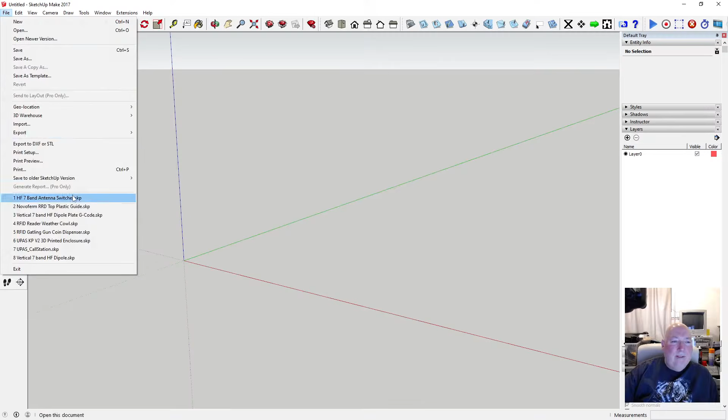So what we're doing today is optimising the fasteners. I've got this idea, but it means I've got to waste some more material. Changing the hole positions before we have the PCBs made, to make it more even, seeing as we've got rid of some fixings. I managed to get rid of fixings yesterday, so that allows us to add some fixings. So basically what I'm going to do is move that hole to the corners. All the corners have holes, which means I've got to redesign.

Excuse me, I've got hiccups. Redesign the stuff. On this bit here, the lid, we've only got 4 holes and they're slightly offset, they look a bit off. So what I'm going to do is put one in each corner, move them over. It's a bit of a shame because I could either hand drill these or just make some more. Bit of a waste of copper, but anyway.

Anyway, I need to do it. Because the bottom one, the base aluminium, has got 8 holes anyway. Some were for fastening the motor add-on, the stepper motor add-on. Once this is a tight fit, when you push this stepper motor add-on into the shaft, it basically stays there. So what I propose to do...

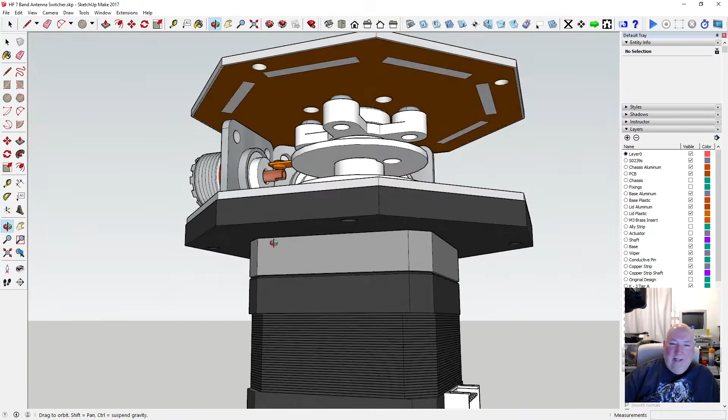What we do is I create a new one of these and have it overlapping slightly, so it sort of sits in. Once you push this over, you don't need any more fixing holes. You push it over and the sides just grab like a cradle around it, and because it's a hex shape, it'll just hold it still. All you need to do is, when the shaft clicks, it just holds it still, which it will anyway. Probably will without any material, but I think if I do that, then we just pop it in. The shaft, the stiffness of putting that into the shaft holds it on. Yeah, so it holds it on, and it's a quick fit without any fixings.

So it means I've got to redo it. I don't know how much copper clad I've got left. Probably haven't got a lot of this copper clad left. Let's have a quick look, see what we've got left.

This is going back about 10, 11, 12 years. So I've got this little tub with leftover copper clad. I've got a single piece of single-sided copper clad. I've got some prototyping board. I've got all these bits. Now, is there going to be enough to make it again? I don't think so. No.

So I've literally got one piece that'll do it left, and this is it here. It's only single-sided, doesn't matter. Now I can either make it out of that because I'll need to do some tests, or I just get the drill and mill out the holes, guess the holes and mill them out. And I also want to get rid of these holes out of here as well. I've had an idea about that.

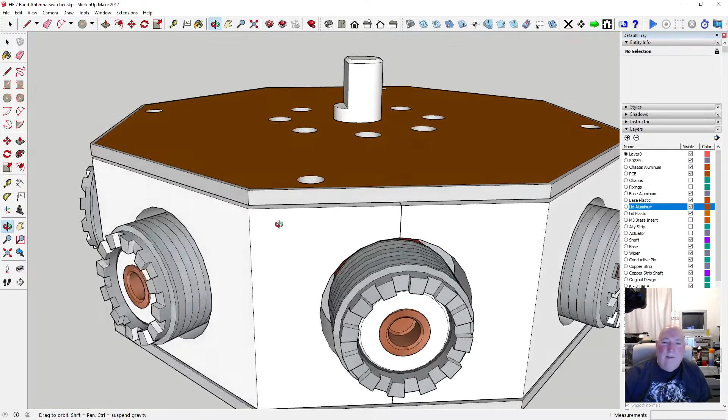Outputs, oh there they are. So when these are sticking up like that, they slightly stick up there, can you see it? That's by design. So you put the aluminium on - well it's not, I say aluminium, it'll be PCB. So when you tighten it, because you've got a fix here and one there, you've got force shared across this level and that level, so it holds them down squarely. If I've just got this aluminium holding it there, there's pressure down there, and this is free to bow. We don't want any bowing.

So anyway, it'll make it look aesthetically pleasing, so we can get rid of these holes as well. We'll have to make a slightly different shaft - we're slightly low anyway on the shaft, we're low now on this one, so I'd have to lower it a bit more to enable a plastic to go over, basically sits under here, a plastic that has all these holes in it.

So we want a couple, or maybe 4 little locating holes, small, that we can just push our plastic shell, bearing, whatever you call it, shoe. Yeah, and one on the bottom as well, so one on the base. So the one will also go on the inside down here. So we've got it, and that'll just be a flat surface, and it's just going to allow it to sit on it. So it's a throwaway shoe basically, a replacement.

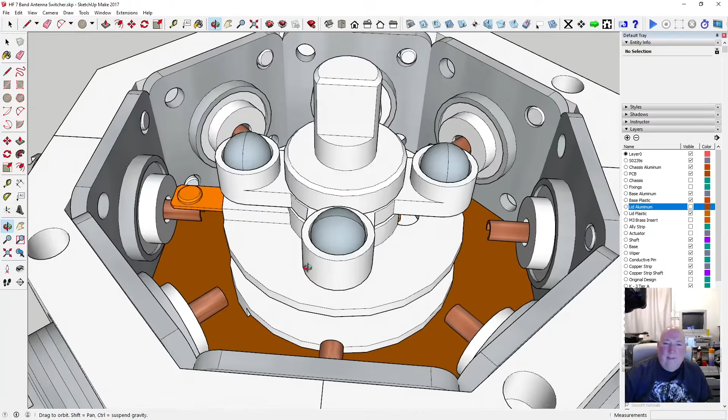Let's just have a quick look, see if there's anything else before we start the work on it. Yeah, so these are too low now, but we need them a little bit lower if we're going to have a shell anyway. So the bearings will be running in a plastic shell.

I just had an idea as well - you could have different thicknesses of shell depending on how much snap you want. So you could include, you know, you could reduce it, or if you want it lighter or more snappy, you could just have a different thickness.

Anyway, that's beside the point, so let's just get on with it. And it means I'm going to have to lose more of this work, I'm going to have to go over it all again. But the idea is to have something that's, you know, people want.

Now the only other thing is, when these are joined there, I was thinking this wants to be a ring really, but it's better to print it like that. So that gap, if you look at it in X-ray mode, they sort of interlock there with these tabs. I mean you could put a little spot of super glue in the end and just push together, and if you hold it tight, maybe you won't see hardly any gap.

So I mean there's no advantage to not gluing it, as long as you don't get the glue everywhere, but I haven't tried it yet. I think what I'll do is I could try this one actually - these are going to be scrap now.

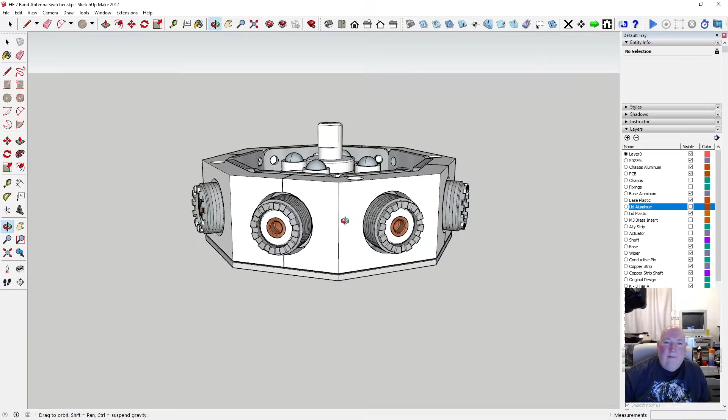Right, so what are we going to do now? Let's just get on with it then, back to the design. So there's no point keeping backups, because I'm going to have to do all this again. Now, going back to the hole all the way through, you could put a longer fixing and a nylock or a nice chrome dome nut on the one end, but you'd have like 8 of them.

And the bottom doesn't matter, cap head or something that gets covered up. So I've got a bit of work to do, but the main thing is the geometry and everything is intact. It's the same idea. Everything else is good there.

I've lost my shells. Where are they? Yeah, there's these shells that hold. This turned out a good idea. It's okay. So anyway, where do I start from here?

So I suppose we want the same hole again, moved over the corner. Because they're a component, I should be able to just edit the one and it'll work on all the others. So let's do the bottom first.

Right, let's do the bottom first. So I basically need to move the centre of that over there. So if I just draw a temporary line or a measurement from there to there, and one from there to there, and probably one halfway down.

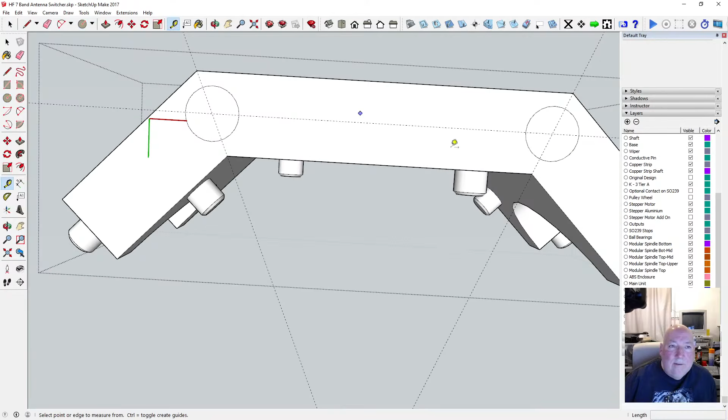Yeah, so then we need to go down 5.1 millimeters. This is so our brass fits in just right. Okay, so we're all right there. Let's get rid of this construction line. So we've managed to move them too.

Now I've got to go back around. Yeah, it does look weird, I suppose, because it's... hang on, if you look at it in parallel projection, we can't get underneath easily. Yeah, it does look closer to there than there for some reason. Why is that then?

That's definitely half. Yeah, because I'm halfway around the bend here, so I'm going around the bend. I don't know about halfway around the bend. So, I think, have I actually... right, let me just do some undo,

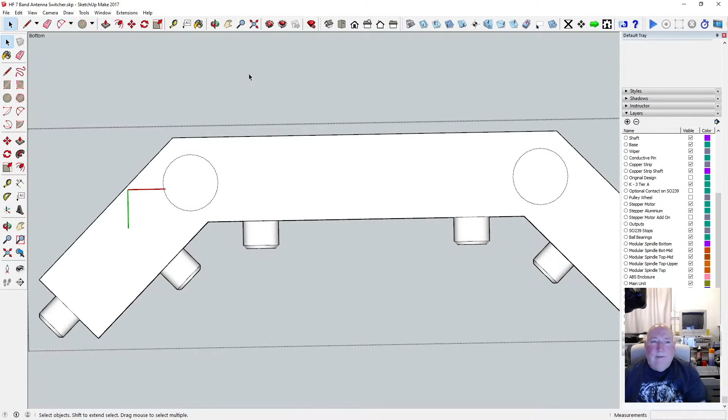Okay, so I'll do the same again. 0.25. Right, okay, so it's off center by 0.25 of a mil. Let's go back to perspective. Drop them down, 5.1 mil. Right, okay, so we want the same again.

If you want the same again, the easiest is just to grab the circle, copy it, paste it in place, turn the thing up like this. You still got them selected, so then move them if you can up, straight up like that. And then what we're going to do is cut them, go back in here and paste in place, paste them in place. Right, so we need to just manipulate this up out of the way.

Well, not that one, just rotate it round. We need to get rid of this one. So let's just bring that up and disappear that one. Okay, that's gone, and we want to bring those two down to the surface. So I'll just grab them again.

If you want to just go down or up, that's not on the right axis, press up, and if you head towards down, it'll automatically put them on the surface for you. Alright, there they are. I just need to hollow them out.

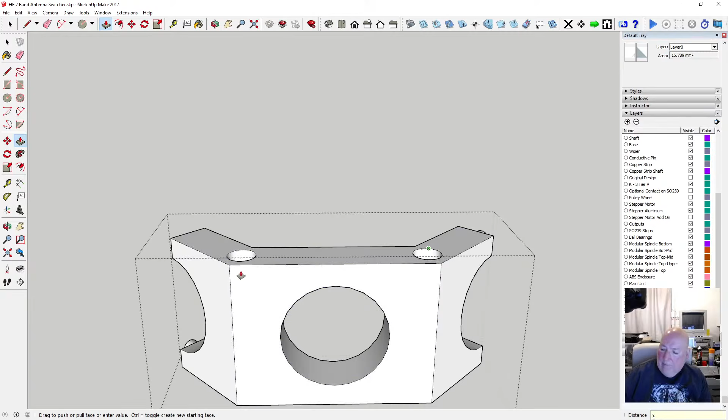Actually, they don't look right again. Why is that then? Now they're okay. So we'll just bring that down to 5.1 and 5.1. Right, and that should have done all of them.

Yeah, because they're a copy. So they're all in the right place now, and the bottom. Now all the fixings are wrong in the plates, the top and bottom covers, all fixings are wrong now.

But we're going to use extra brass. We've got rid of fixings out of here, but we're going to be happy because it's going to be fastening down the lid nicely in the corners. So what do we need to do now?

We need to, right, so I'll tell you what, let's take these out of here. I'll just get rid of these. The easiest way is just to do that, and just grab around them and do that. They're no use to us anymore then. Right, so they're gone.

Which, yeah, that's okay. So what we want now is all the holes out of here. So we want a copy of the holes so we automatically center them. I'm going to copy them out of there, paste them in place. I'll have to go around each one and grab those, copy of them, paste them in place. I'll just go around slowly.

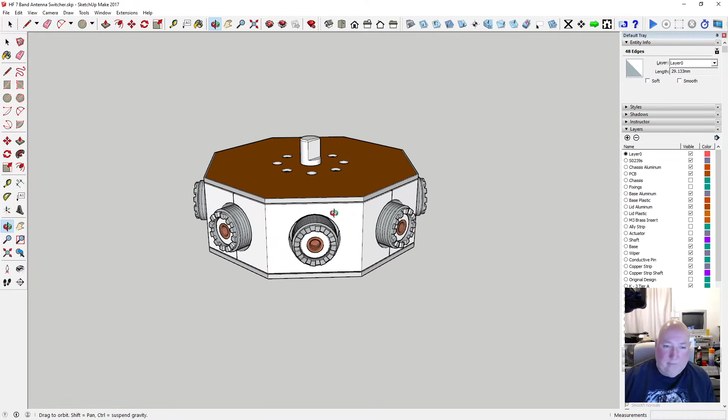So there's these next two. Right, paste them in place. Now the final two. Now if we're good, we can reuse these for the bottom one as well. So we'll make a copy of these before we finish them. All 8, paste in place.

Now I need to grab all of them. So if I just select something like that, and move them. Yeah, that's all they are, and it's on the blue axis. Axis, not access, axis. Right, so we need to put them onto there now.

So if I need a copy of them for the bottom, let's get a copy straight away. Hold the control in while dragging, go down on the blue axis, we'll leave them down there for a bit. Alright, so we want to copy these now, and cut them and go into this plate, and paste them in place.

And what we want to do now is lower them down onto the surface. So press up arrow, move down, and they go automatically to this first surface. Right, so these holes are too big because these are the brass fittings. So we need to go over them now and think about it, yeah, it needs to be a bit bigger.

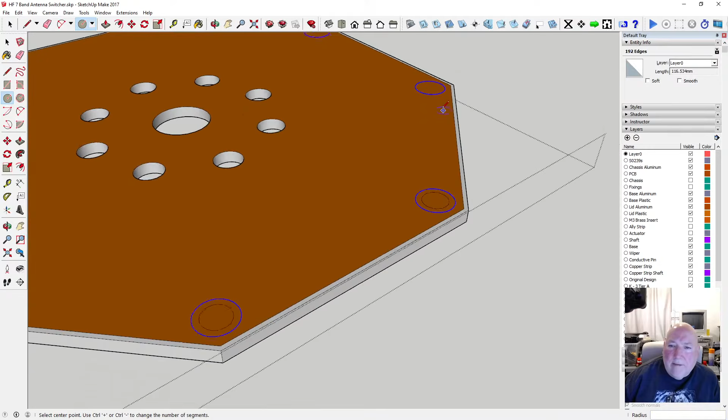Yeah, I think we can put 0.2 of a mil, I think we'll do that. Right, let's do that then. So let's do the rest, 1.6. Yeah, because we're going to have them plated. On the real circuit board it'll be plated. So 1.6. Yeah, but at least it'll be able to be bolted down evenly, rather than have one sticking up, it'll be even all the way around.

If I design this good, now we're having the inserts instead of the 1.6. Let's get these done. I'm going to delete those, and these are going to be moved onto a bit of plastic, so I need to keep them for now.

We'll have to get a copy of them. Let's get a copy of them now while we think about it. We're probably going to need a copy of that one as well, so I'll copy that out. I'll just come out a minute, paste in place, and then we'll lift them up out of the way for a while like that.

That's going to be our holes for our plastic. So back into this, and we'll push these through. These are new holes, 3.2mm holes after plating, electroplating, or through-hole plating, when they through-hole plate the PCB.

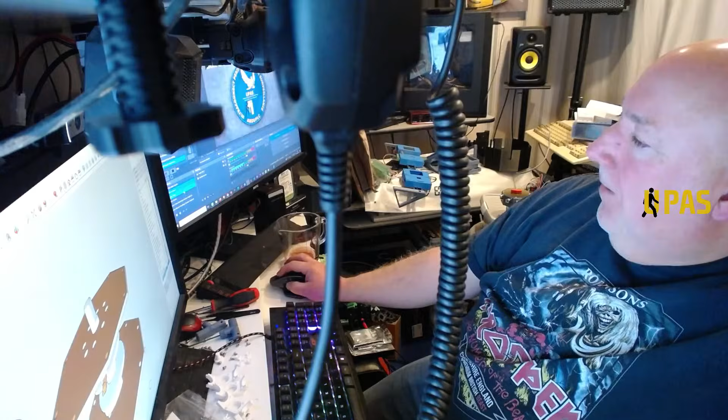Alright, I'm back. Oh, wrong camera. Yeah, I've got cameras, I've got another camera here. It's not plugged in. That looks down on when you're doing work, but I suppose I could have switched that on. Never mind. Right, anyway.

Right, so we're back on this. So it's got copper going through it. You don't get copper going through it. Let's just make that right, otherwise it'll look weird. I suppose what I could do, for the model's sake, I could make it look like we're gonna get it. Let's do that.

Right, so we're gonna just get that back, 1 mil. Let's just go around them all, 1 mil. So you can't automatically select. Why not? Should be able to. Yeah, I can, now I can. So I'm going to go around and do a 1 mil pullback on all of them. It's just so when people view the model, it looks like the final circuit board.

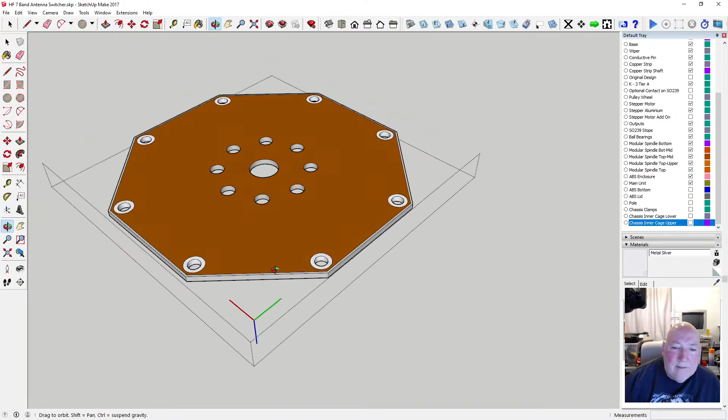Right, so we've got them there. That's basically the same either side. Right, so that's what it's going to look like, roughly. Oh, you won't, no, you won't see the copper, it'll be black, a black PCB. So let's make it black. It's copper on my design from these, because this is copper, but I'll change it to the real thing now.

I could go synthetic surfaces and try that. What's that like? Not quite.

No, it probably looks okay. No, it doesn't look okay, does it? No.

I'm trying to make it look like solder resist. So let's go to a real colour then. Just go down to, I think, a black. Alright, so we've got a black. Yeah, that's about it. So we've got a black PCB.

We can have a white or gold silk screen. Use the silk screen that normally represents things like that. Where's my pointer gone? So the graphics.

Can't see the logo there. It's not showing up very well. Why not?

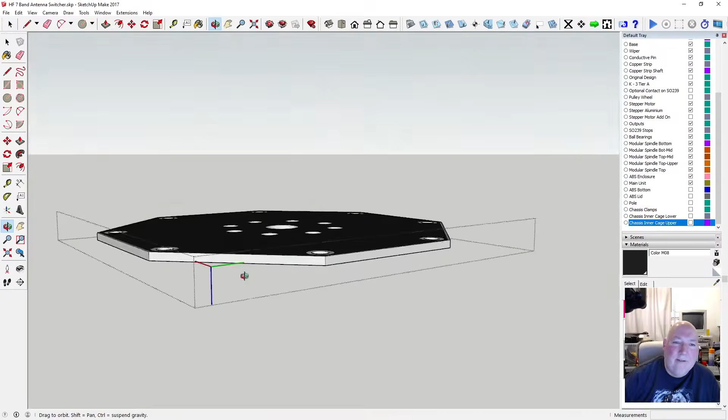But the solder resist is pulled back here to expose this pad, so it can actually make connectivity with the SO239s.

Anyway, so we've got that so far. So now we need to get rid of these holes.

But we want to reutilize the holes, some of them. Unless we leave the holes where they are. Now we don't need them that big.

So we need a plastic to go on there. So I suppose we ought to make the plastic really now before we get rid of them holes.

So there's our outline for our plastic. So we want a circle. Let's just measure from one side to the other.

30 mil. We need a bit over, so let's have a 16, a bit over, plus a lip. Can't be too wide enough.

Let's just go 36 mil, so 18 mil radius. So 18 mil radius. Let's just put that.

Got to be careful, so I'll tell you what, let's group. No, we'll group this one. We'll make a, let's make a component.

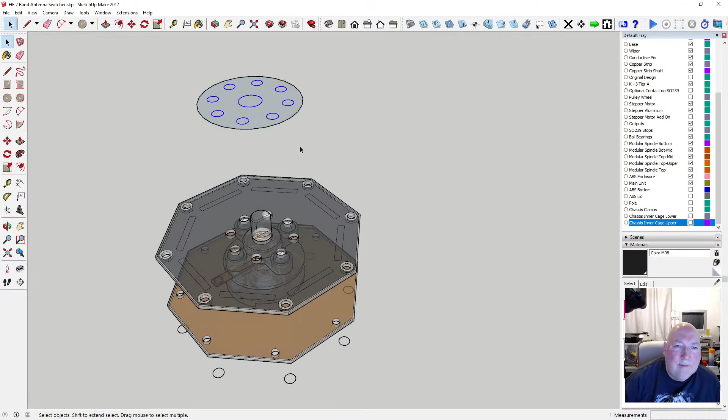So what we need now is, yeah, we need to grab those, cut them, put them in here.

Right, that. So this is going to be our plastic. Actually, we didn't want to do that. Cut them.

Paste in place. We need to give this a thickness first, so it's going to have to be a certain thickness. What size?

Don't know. Let's just go with... I'll go down and we'll call it 2.5. That's probably a bit too much. Let's say 2 mil. 2 mil thickness.

Right, actually we should be able to get those back out now. Cut, paste in place. We'll make it out of white as well, the same stuff as the shaft.

Now that's the center hole for the shaft, so we should be able to push that through. Okay, we've pushed that through.

Now what I wanted is the inverse. Yeah, the hole. So we need to go back to the other lid now. So this lid, because we're going to have a plastic insert.

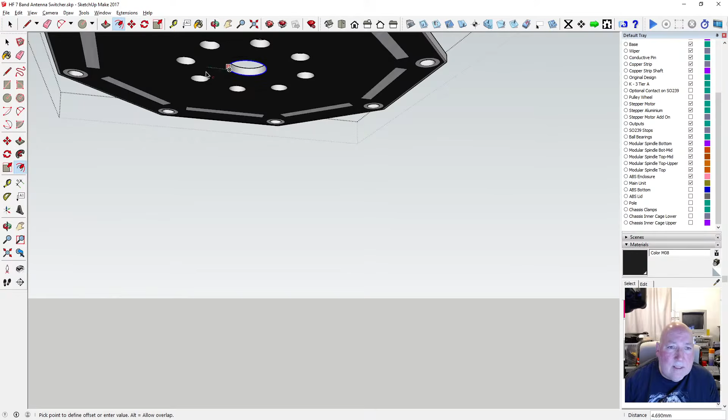So I'll tell you what I'll do. If I go from this side, what's it do it? So 1 mil. Oh, hang on, let's go come underneath it. Oh, it did actually work. Right, so I need to just push that down. Oh no, I've already done that, haven't I?

Christ, I don't know what I've done now. I don't know what I've done. Is that the original size? Alright, let me just do some backtracking. So that was the original size. So redo, Control and Y.

Right, okay, so that is the original, I think. So I need to fill it. It needs to be silver, which is the metal colour again. I think it's that one. Can't tell now, is it that one? Yeah.

Right, so we've got that. Got to come back to the surface. Oh, why does that one look different to that one? What is going on here? 2 mil, no, we don't want 2 mil. I've lost track of it now, haven't I?

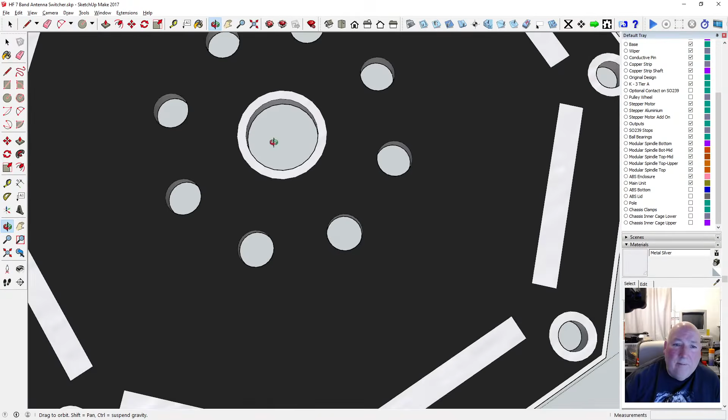Yeah, so 1 mil. So I need to cut that out like that, then pull back just 1 mil. Paint it. Come back onto the surface. Oh, it's now done it that way, look. You can't win.

Right, so it wants to do it this way now. Don't know why. Pull it back. 1 mil. I've lost track of it now. 8.2, yeah. Is it going to let me do this? Or is it going to hollow out the bottom again? No, it's let me do it this time.

Right, okay, so we need to pull back 1 mil, and paint that and that. So we've got some plating. Okay, so that's that, yeah, that's that. So then we need to get back to our plastic insert.

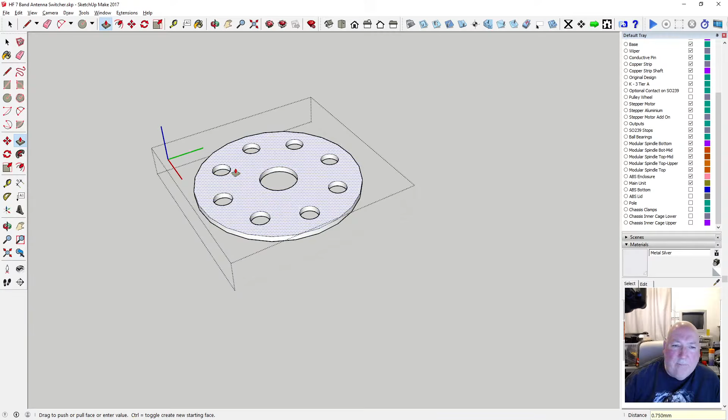Right, so now we can print that flat like that, that's fine. But it needs to have a lip on it, which we said was 1 mil. So let's do a little 1 mil thing. Now that's 8.2, that's the 1 mil. Yeah, because it still needs to be 8.2 in the middle, and then we need the 1 mil.

So then we'll need to go up the thickness of the PCB, which is 1.6. But we don't mind if it sticks out beyond the PCB, round by that bit. We don't mind that. So what I'll do is, I think I'll make it 1.6, 0.4 of a mil. Yeah, let's do it. It's 2 mil, so we've got 2 mil. Okay, so we can print that out flat like that.

Now it needs to, yeah, somewhere we need to have some way of holding it in. Yeah, it's got to stop it from spinning. So it's going to need probably something to locate it. We'll have a look at that in a minute though. We've already got a component, so we could do with putting that component.

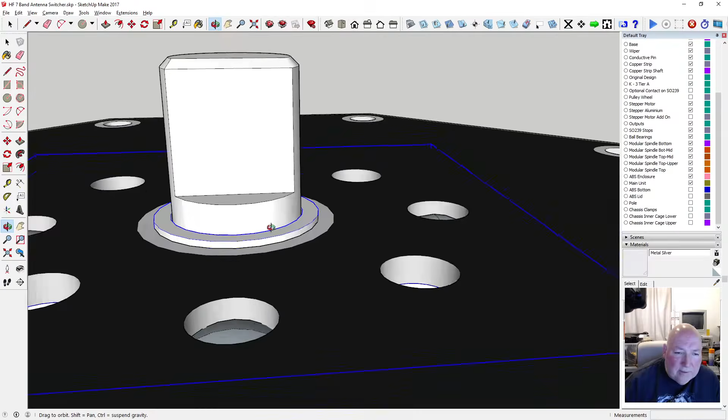Right, what's that like? Oh, that's okay. So we've got that, and it's also got the insert sticking out here, just about. Yeah, that's right. So we want to be able to push that in there, but it needs to be able to stop it spinning. It's no good those balls locking into it and it sliding around. It's got to lock into the top piece.

We don't need all the holes now, so we need a couple of locating holes. I think 4 of them probably. So 1, 2, 3, 4, or them 4. Doesn't really matter.

As soon as we've already got the holes there, now what size are these? Let's see what size these are. Can't remember. 4 mil. That's quite a lot. You actually want a pin locator. Need to be push fit so it stays in. Actually, when it's all assembled, the pins will stay where they are anyway, because they're sandwiched in.

Well, you can be able to push it into the lid and put the lid on without it keep falling off every few seconds.

So right, so what we'll do, let's just have a look here, what's going on. It's got to look right as well. Because one of these holes is also the stop. Yeah, so we've got a stop going on down here.

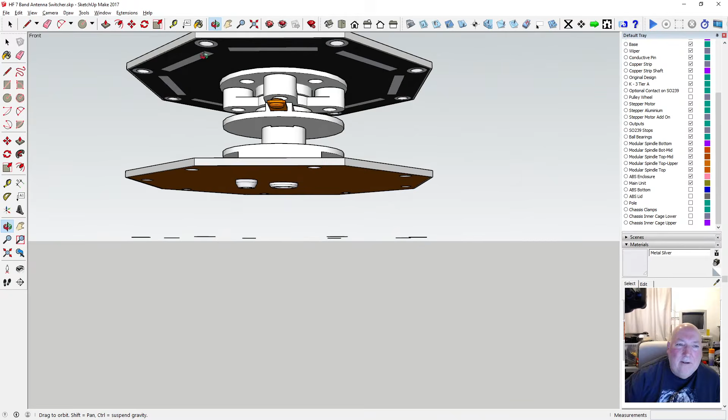Actually, it doesn't need to have these. Oh, it does actually, yeah. Of course it does. It needs them on the bottom where the SO239s fit. Yeah, so it needs the same. That one.

So I'll tell you what we'll do then. We'll copy that when we've finished. So let's go back to the plastic. No, it's not there. Where's the plastic gone? Oh, it's not there because I'm in the model. There it is.

So this plastic then, where these holes are, we need the holes, but we need to... That's going to be a little bit of a problem. Because we need... yeah, so we need a hole, but only half a hole. Half a hole, and so we need to seal the...

Right, so if I take the top off them... Oh, we still need the hole there to know where it is. So if I take it off for now, the top bit, we're going to need them back again. And now this is so I can make half a hole. So I need the holes for the ball bearings to sit in.

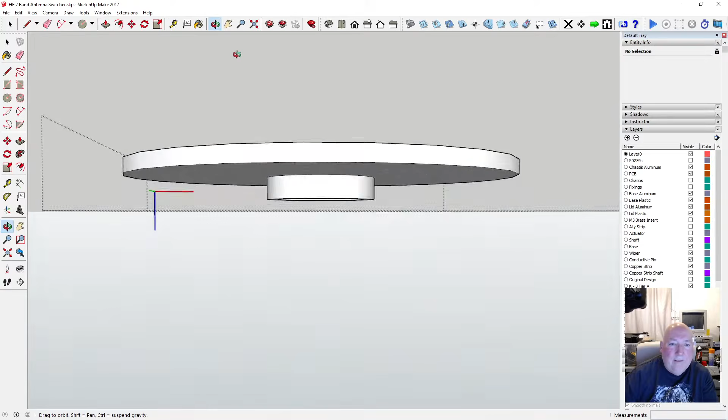So, right, let's just go with that idea. So, what size have we got here? 1.25, wasn't it? Yeah. I think it's probably not enough. I'll have to make this thicker. Oh no, it's gonna go, I don't know. God, 1.25. Yeah, let's just go with that.

No, it's not going to snap in, is it? It needs to be bigger. Undo paste. Let's just make this. It's going to have to be 2 mil, so 0.75.

I'll do paste in place, but we'll have to go X-ray. Oh, I've lost them, let's get them back again. Bring them up to this. Oh, I've lost them again - keep selecting the wrong tool.

Alright, let's bring them up onto the surface. Is that the surface? Yeah. Okay, now we should be able to do, yeah, that's it. So we need to drop them.

Actually, that's the wrong way around. Yeah, these ought to be cup shaped, really, hadn't they? Tell you what, we'll drop them down. What should we say, 1 mil?

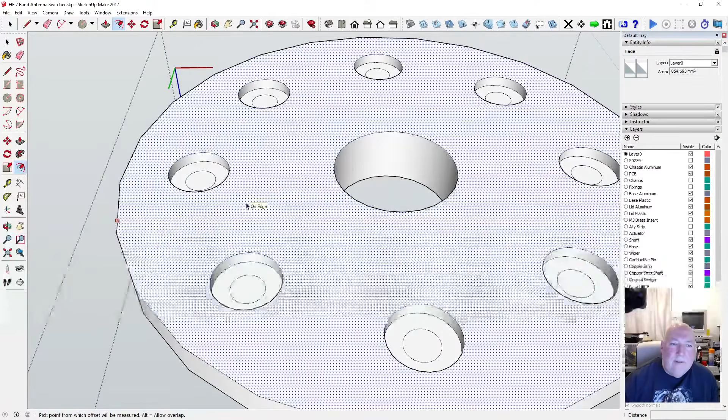Right, 1 mil, and do more at 1 mil from the edge. Okay, 1 mil, and I suppose - how did I do this last time?

Yeah, so we just want a little bit of an indent on them, a bevel. So I could go down - I tell you what, I could just go in. Not a lot, you don't want a lot. I don't know, 0.5. And then I could grab hold of that and take it down to there, basically 0.5, and that'll give us this cup shape.

Yeah. Okay, so let's carry on with that. Oh, I've got to make it go down 0.5. Let's just do them all at 0.5 and then drag the thing down.

And it begs the question, why isn't this a cup shape? Yeah, maybe that needs to be a cup shape. But if it's a cup shape, it won't snap in, it'll just push in. I need to actually snap into place, I think.

Anyway, this bit can be made again. What we can't do again is keep making the PCBs. So this little insert can be altered till it's perfect size. So, yeah, we'll keep going with it.

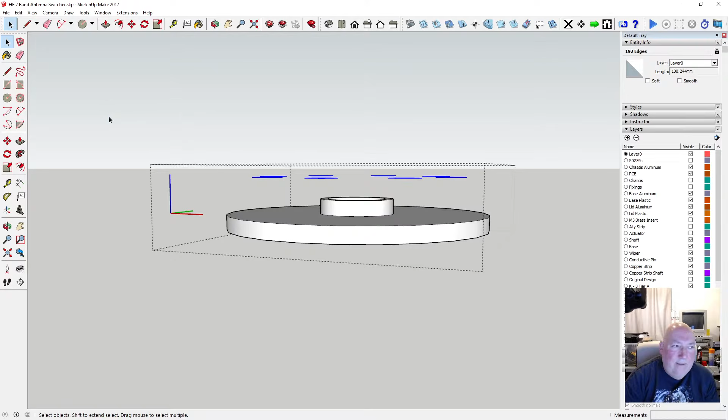Right, so we've got that there, we've got the cups, yeah. So now we need to turn it over and we need to drop these down to the surface. I want to save this really - I don't do nearly enough saves. I mostly do saves without even knowing, most of the time.

They're on the surface, so they need to come through to - they don't have to go to a point slightly higher, they can just go 1.6, as long as they locate, and they're going to be the same size they are now, I think. Yeah, 4 mil, so they'll just push in.

Okay, so let's just do 1.6 - that's the size of the piece, the thickness of the PCB. So anyway, it should push in and stay in. This piece, this sacrificial lining, let's call it a friction lining.

You could make them slightly dimpled, beveled, but I don't think we need to - it should just push in. If it doesn't push in, we'll make them, reprint it out slightly smaller. So that then can be printed now, probably.

Okay, so that's that, and you can see it's already flush through the holes. Oh no, did we actually get rid of the holes? Can't remember now - no, we left them. That's right, we do need the holes because it doubles up if you want to put the bearings directly on it.

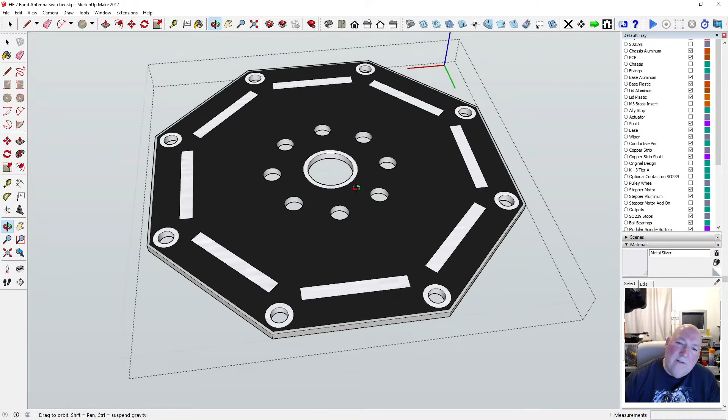Right, so we need the same underneath. We're going to get 20 boards made, 2 for each, so you can make 10 of them, and they're going to be the same top and bottom.

Andy, how you doing? Andy Crowley, he's always a regular.

Oh, clock cycle. Wait, welcome clock cycle 32. That looks awfully like one of my graphics. I created... oh shit, I know what it is, that is me. I thought someone else was answering you then. Sorry, I'm monitoring with, yeah, clock cycle 32. That's one of my alter egos on a different browser. So if you don't see me coming up, the only way I can get you to notice is I'll just say hi from within OBS. There you go. So what it was, one of my monitoring browsers, normally it wasn't showing any watchers, it was just saying no watching, so I've got no idea if anyone was watching. Something's happened to the cache on it.

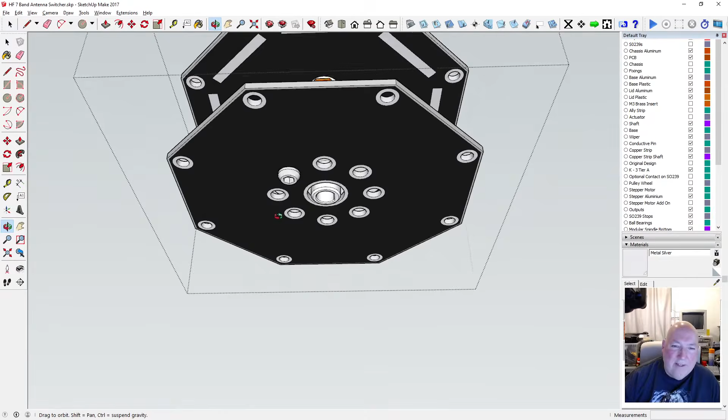So we've got the same circuit board in black, not anodized aluminium anymore. It's PCB with black solder resist, which means we can silk screen anything on it. This bottom one, I'm thinking of silk screening anyone who contributed to the design, their name on it, a bit like the Amiga 1000 where the designers put their name on it. So we could have a silk screen there with anyone who contributed - that includes you, Andy. So I think we're going to have the names on here. Why not, that's if you don't mind. Doesn't mean anything, it just means you helped design it, basically. It's no legal responsibility or anything like that.

Right, so I need that plastic lining now, so I'm going to have to alter the shaft again. We've got to get the plastic lining, and work out a separate lining to clear this fixing, but still grips in, just to hold itself still so you can slide against it. Yeah, because we don't want plastic onto circuit board. We want a little bit of a lining, it doesn't have to be very thick.

Right, let's go back out of here. Right, where's this plastic gone? So we've got the plastic there. Now that is slightly wider than the rest of the shaft. Did it need to be? I'm not so sure, might as well. It doesn't harm it, so we want a copy of that now.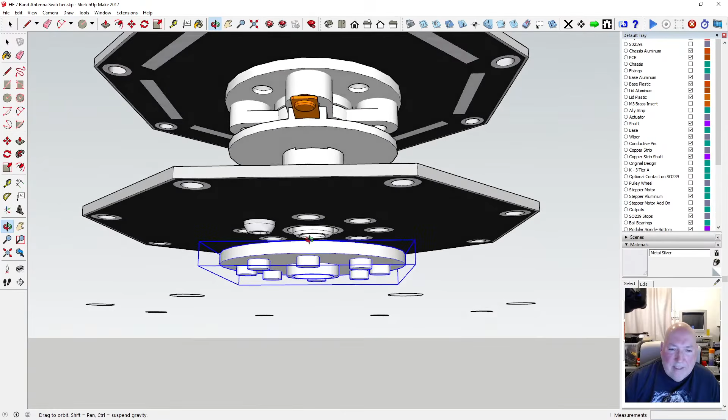We're gonna have that already got the right size because we copied the top. So we need to fit that now to the bottom of there. Right, so if I grab it from there and go up on the blue to tell it we're going up on the blue, and then use this as a reference.

Actually, it's not enough. We've got the wrong surface. So undo that. We need to grab it from this here, push it up and tell it we want to come flush with that surface there. There we go. So we're in there.

We've got the nut. Now we're going to have to make it unique to avoid. We need one with a hole in it. So let's make it unique.

You don't mind? Yeah, no? Oh, great, great. Yeah, so when I make the circuit board, we'll add to it, now you can have your name on it. And on the Amigas, they were signatures, but I don't know if you want to put your signature on. Probably not a good idea with identity theft and all this kind of stuff going on.

It was never a thing back in the day, was it? But I'll just put the name on. But anyway, so

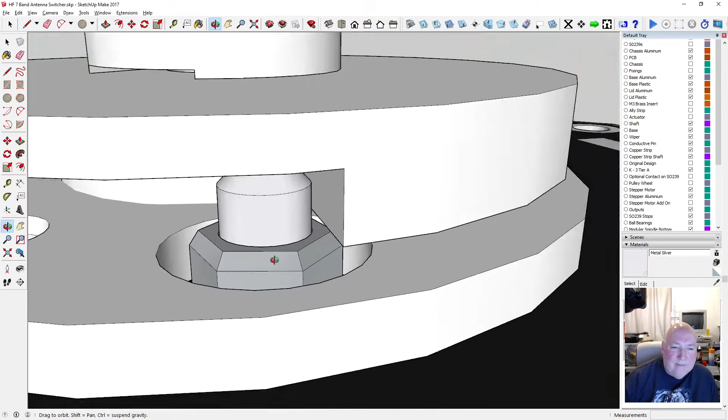Yeah, so you can still put your nut on. Might have a bit of a problem tightening the nut though. It just stuck out a little bit though. Yeah.

Okay, so there's your nut. You might have to get your... oh no, that pushes on anyway.

Now, so you put your nut and bolt, you put your fixing on, M3 and your nut, on the circuit board, you tighten it up, and then this just drops over the top of it after. Yeah, and it pushes through. You can't really see it because it looks like it's flush with that.

And if you wanted to, you could print it in black ABS so you can't see the white, but you will see those, unless I make the silk screen go over it. Can be through-plated and the silk screen can go over it.

Well, I'm not that fussed really. One will be covered up by the stepper motor driver, and if we want to cover these up, we can make the knob wider.

So let's try the knob on, see how much. Yeah, so we could redesign the knob, like they do traditional one, with some round, and then yeah, could do.

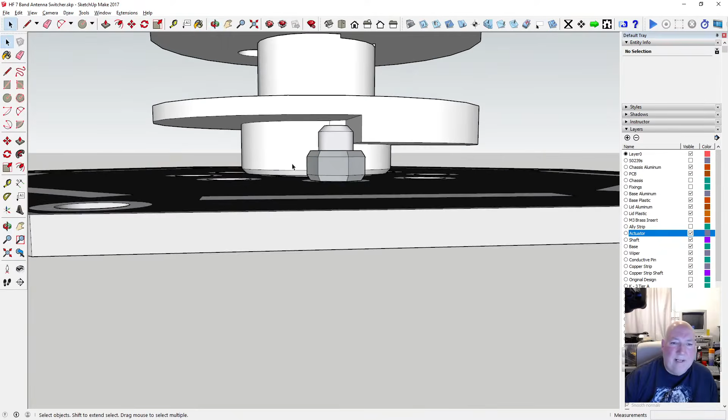If we can. Right, let's just measure that packer. 2 mil, I think I said. Yeah, so if I go into this, and what have we got there? 2.4. So we can do, just grab the whole thing there.

That's going to go into the circuit board, and we're going to have a lining. It's going to sit on a lining, isn't it? Let's just try and move it up by...

Let's move it up by 2 mil. Let's see what happens. Well, you got your 2 mil. Right, she just got away with that. Just about got away with it.

So what we need to do now is see if that actually fits with the lining. Yeah, we've got a little bit of clearance, that's okay, so that'll do. And you've got 2 ABS surfaces, and they're very slippy, so yeah, okay, I'm liking that so far. So that's not in the way.

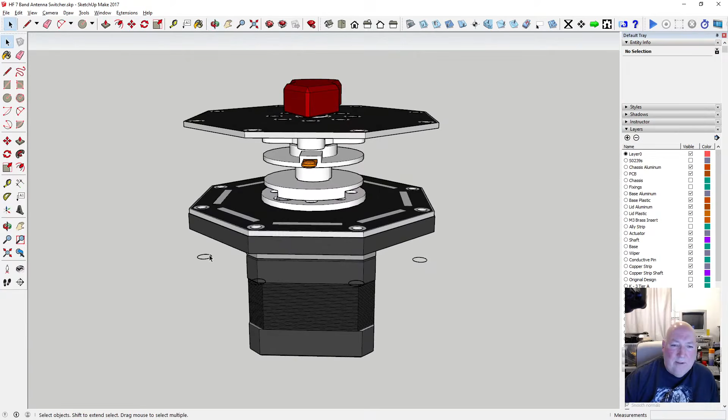So this add-on, yeah, we're going to have to alter that now. It's going to be quite easy to alter this. Oh, we don't actually need them anymore because we're not using them. Let me just delete them out of the way. We're not using these anymore because we're all about reducing fixings.

So let's get this plastic here. Right, we still retain the stepper motor wells, but all other fixings - oh no, they need to have a recess on them. Yeah, we still need the recess, but in the corners. So the ones I've just deleted, I do need them. Right, undo, close, undo, close, undo, open, undo, open, undo, layers, undo, erase. Right, so we do need them.

So let's grab them, cut them, and put them in. Where's your stepper motor add-on gone? There, right at the bottom. So it's just this bit we want. So we'll paste them in place. There they are. I need to bring them up here, and we'll leave them there until we get rid of.

We've got to get rid of these old holes now. So let's cancel some old holes off. So we don't want that one or that one. Can I just delete that and that? Yeah, I think I can. We don't want these old holes. We're not using the holes anymore.

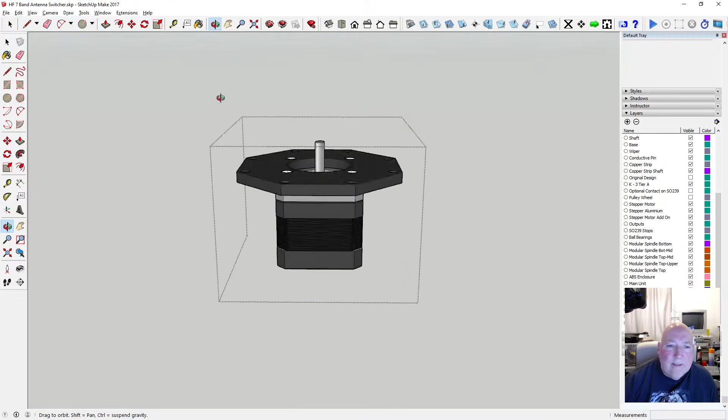But we've got to alter the size of the outer. I've got this idea without using any fixings. Right, so we've got that. That's as it is, so that covers all the fixings up where they meet. Under here, you can't see the fixings.

I've got to move all the fixings yet. So all the fixings are now in the wrong place. So I'm going to have to redo all the fixings. But the hole is there ready for the cavity in the plate to miss the fixing.

Right, that's fair enough. Now what I wanted to do is, because this is fixed to this spacer and this add-on, and it slides in on a flat side of a shaft, so all we need to do is stop it rotating. And to do that, all we need to do is raise the side up level with this bottom PCB just a little bit.

So how we do that - we're already slightly bigger than it, so we need a bit of clearance. So that's our clearance ready. Okay, let's just come at it from this angle. So I need to grab, extend the outer bit. Right, so it needs to be the thickness of whatever it needs to be to go up along the side.

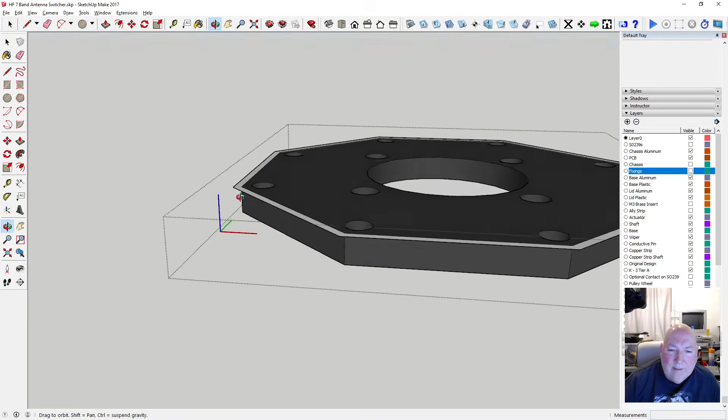1.5 mil, yeah, anything's better, it doesn't need a lot. Let's say 1.5 mil. So there's our 1.5 mil. And obviously it can't start from nothing, so it's going to have - can I just pull that down to there? Has that created a hollow? No, we're okay. Okay, so we only want to go up the height of a PCB.

So 1.6 mil. Okay. So there's our push on, got to make it the same colour. So we print it flat and it does the walls and it slots over the PCB just enough to stop it spinning, keeps it on.

No fixings required. Yeah, no fixings required, just pushes on, pushes off. Perfect. Right, let's just make it the same colour as this, I'll tell you, go back into it. Let's just make sure we haven't done anything weird with it. No, we're okay. Oh, we've got some inner dimension there we need to get rid of. So I can either start deleting it.

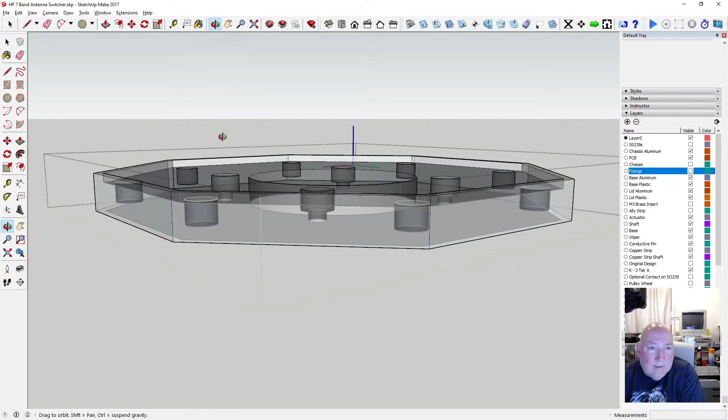Right, I'm determined to get this into a finished state. Not today, but to get it finalised. So that's that. So we just need to get rid of this one.

Right, so we're all one piece of plastic now, according to that. So we've got the wrong colours going on. Right, so we need to make it all the same colour as that. So let's try and find the colour.

Let's say it was that one. Yeah, that's the one. So it's ABS black. Black ABS.

So it's on a flat surface, so this can be printed easily, because this is all flat here, and it's the way it is now that it gets printed that way round.

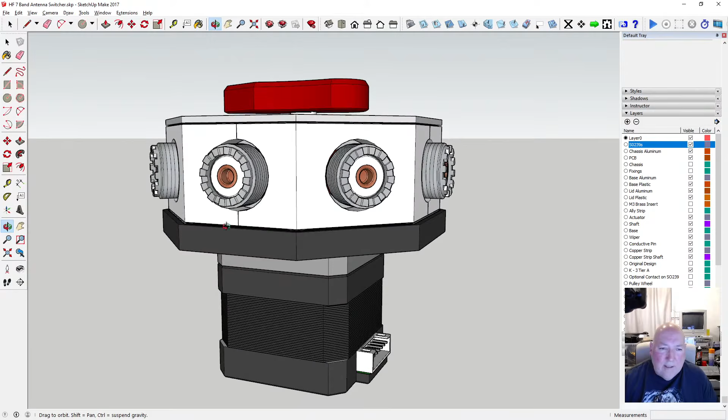Let's put the chassis back and the SO239s. So yeah, it just overlaps slightly there, and it's not going to get in the way of putting your PL259 on.

So yeah, you'll have your name on it, or we could even put the names on top if we have to. But don't forget that's an add-on. That is an add-on.

Actually, if we're going to use the same PCB for both top and bottom, then the names will be on the top. Yeah. So...

Names will be on the top, and just some logo or something, open source logo, names created by whatever, and a little bit of livery to tell you this is antenna 1, 2, 3, 4, 5, 6, 7, and this is the incomer.

So we'll do some livery. So whatever you do on there, the same thing's going to happen here. So the problem is, hang on, it will be in reverse though, won't it? Got to be careful how we do the livery then, because...

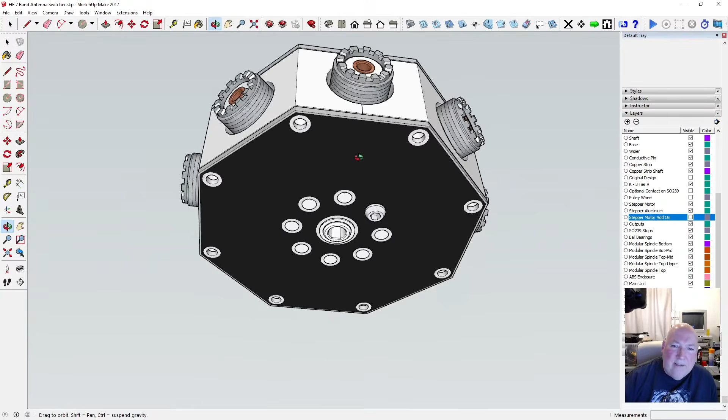So we're going to have to make the livery, yeah, I don't know. That's a shame. Unless we do something clever with the insides, like we've got these pullbacks, so you can't really have livery in here.

Yeah, so unless we just have a little marker, or probably, you know, I don't know. You'd have to have two separate ones. Yeah, because it'll be opposite, won't it? Anyway, we might have to end up having two PCBs made, two different ones.

Or we disregard the bottom one. So the livery's done on the top, and you get livery on the bottom, but it's complete opposite. That'll confuse people.

Anyway, right. So we've done the stepper motor add-on. I wanted to implement that. That looks like it's okay. Covers all the screws. So you'll have some nice screws on top showing. Now that can be anyway.

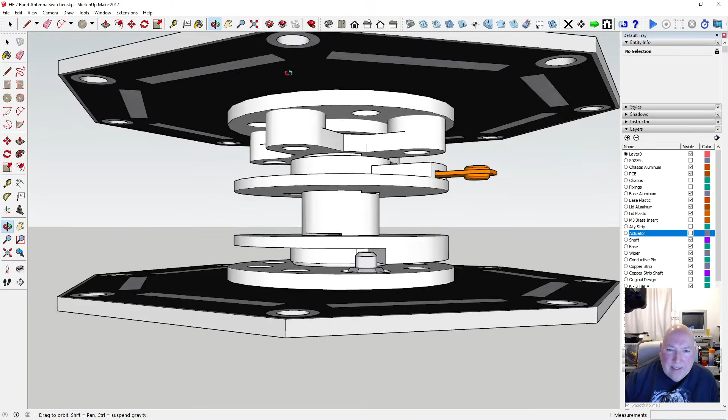Alright, so we've got our top and bottom lids sorted out. And we've got our insert now. We haven't got the space here now, so we need to sort out this bit here. We've got space here, so I think we need to bring that level with that.

Can we do that? Yeah, we can. So we need a bit of space. Right, so there's no harm in bringing that down level with that, so we'll do that. We'll bring that down level with that. Just tidy up this extra bit of whatever this is.

Right, so we've still got the same idea. Oh, there's another one there. So we've got this bit, and we can still get our copper strip in. That, if anything, will make it easier to solder onto, less stuff going on.

Okay, so the shafts come through there. So we've got that bit there. Now that can be slid down. That can be slid down.

I'll just go onto it and bring it back up 0.25 mil, because you never get them exactly right.

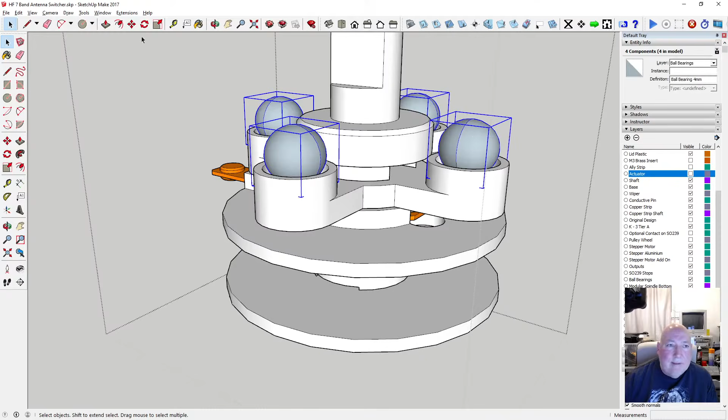Now, where's the ball bearings? Hang on, oh there they are. So they have not sunk down enough, so they're going to have to be sunk down a bit. Let's go down, I don't know how far. Probably something like that. Let's have a look at the cups.

This is why we try and model them exactly the right size, so we can see if they sit in the cups or not. They do sit in the cup. They could probably go a touch lower. Let's just go a tiny bit lower, 0.2. Yeah. Okay.

Right, so you've got your ball bearings in there. They've got a bit of space around them. Now we need to sort out next this bit. Where's the plastic gone? That plastic's part of the other thing, but ultimately we need to get that plastic surface. There's a surface, so we need to work out what we're going to do with that.

That needs to go down, whatever that is, 2 mil less 25, so 1.75. Let's just go with that then. So that whole thing needs to drop down 1.75. We should just be able to do this. 1.75.

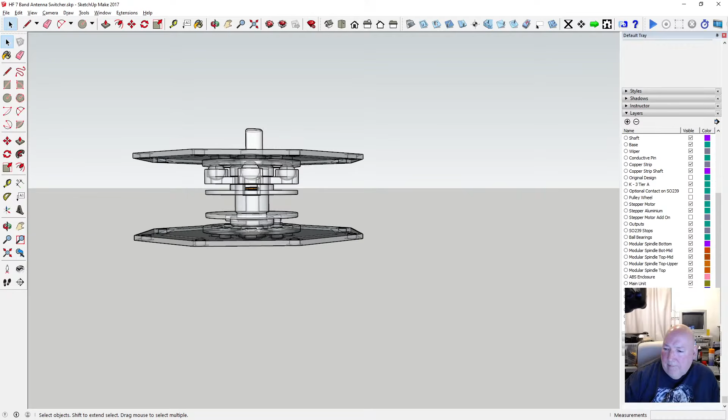Where's your copper strip and the end of the shaft? Let's just make sure the stepper motor add-on isn't going to snag on anything. Alright, the end of the shaft is just there. Alright, so you've got more cavity, that's okay. Probably be able to make that more solid, but we'll leave it for now. Yeah, it's away from the copper strip anyway, that's the main thing.

Okay, so now we can, so that'll lock into there. I'll tell you what, these are starting to annoy me now. I think I need to do something like this, 0.5. Even though it's nice to have a smooth, 0.5, let's just do it. It'll make it easy to push it in as well.

It just doesn't look right in the model. Alright, so I'll just bring them down, 0.5. Yeah, just allows it to, and I suppose this probably needs maybe a 0.5 on it, maybe. Okay, so it just pushes in.

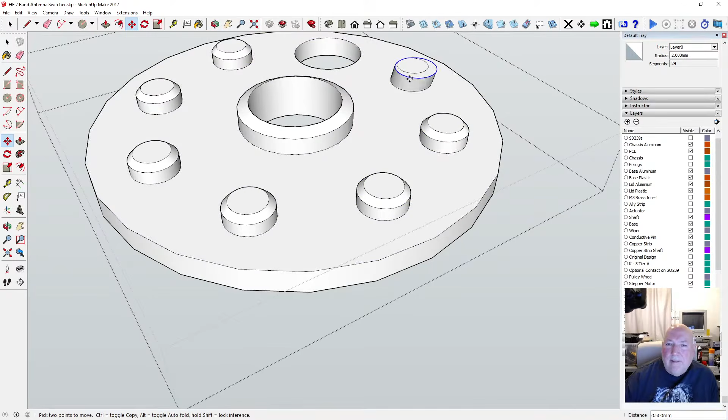Right, so we don't need to do anything with that. That's perfectly fine as it is. Okay, right.

So we've got our two slip surfaces. Right, I'm upside down, why am I upside down? Oh, because I was there. So you can actually see where your balls go. Yeah, so there.

Let's have a look. What's going on? So it's in the cup somewhat, it's just covering the hole. Possibly that needs to be a bigger hole, but it wants some kind of snappiness to it. And they were still stiff, they were a bit stiff. Yeah.

So I think we can make that a little bit thinner and drop this down a touch. Let's just get the right way up again. Alright, so a little bit thinner. Alright, so we'll go into this. Alright, we'll just drop it a little bit thinner, let's say not 1 mil. Let's say I'll just probably put it back where it was, haven't I?

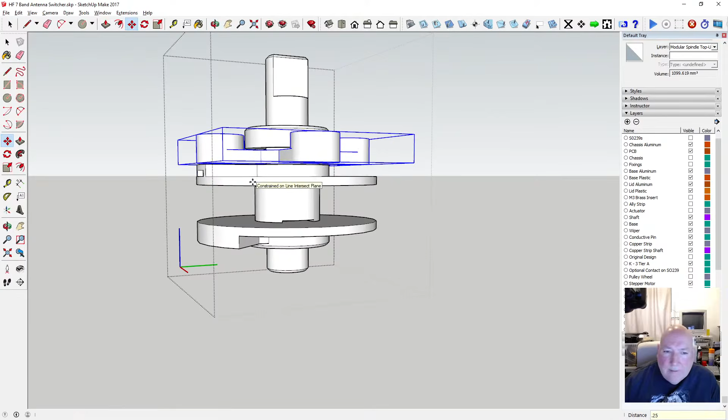And then the ball bearings down, 0.25. Okay, right, so we can't see the plastic. Why can't we see the plastic? We ought to put them there, haven't we? So we'll cut these out. No, it's the wrong one. Yeah, we'll paste them in place.

Okay, you can see where the ball bearing linings are there, and we've got extra stuff going on this one. When we don't need all them holes, do we? Oh, we do. We don't need the cups, but we might as well have them. So let's move the stepper motor add-on off. Where's it gone? Hang on, let's turn it round. Yeah, you can see them. What is going on? Yeah, that's the same as the top, so they're flush like that. It sits in there, right?

Okay. Right, so that's everything done. Obviously this, that's going to be fixed into the top plate. The shaft will move and the balls will snap into those. Plus it should be smoother, and it's a sacrificial bit. If it wears out, you just change it, but I don't think it'll wear out if it's just about the right length. So you build it in stages. You can get to your wire.

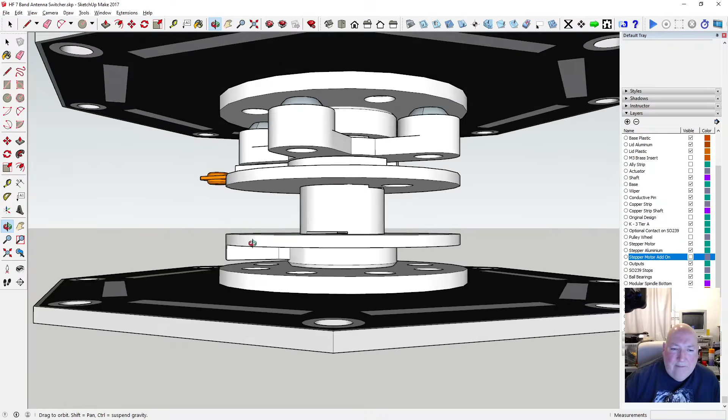Now, we've left that the same place. Yeah, so everything else should be good. Right, what's next? What is next? Why can't I see anything? Right, let's put the stuff back together then. So we're still calling it lid aluminium, but it's not. It's a PCB, so we'll leave that for now.

Alright, the actuator obviously needs a redesign, maybe to cover this. But before you got the option, you could redesign that and have the balls coming through the PCB, but anyway.

Right, so where are we with it? Right, none of the brass fixings, the brass inserts, they're not in the right place now. So they need to be realigned. How long have we been going? 2 hours. Right, do we need to print anything off? Not really. We're not in a great rush to print because we haven't got any PCBs.

What time we got? 9 o'clock. Is that enough for one night? The rest is just moving stuff around, isn't it? Yes, the rest is just moving stuff around, fixings. Let's just try and I'll put it back together, see if I've forgotten anything. Have I forgotten anything?

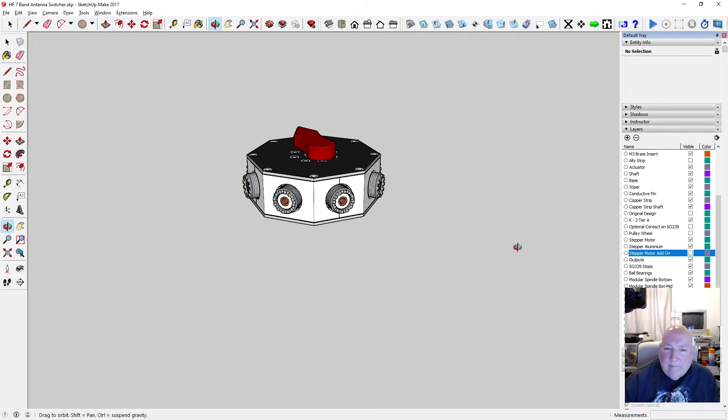Stepper motor, where are you? Gone. No, keep that on, that's the lid I wanted, but we're going mad. Yeah, so you got your cage. Those cages worked out alright, and there's nothing in the way of anything. Yeah, nothing in the way, so it's all good at the minute.

So we probably need to redesign that to hide the holes. Rounded, or at least rounded at the bottom. Or we could make it the same shape as some of the modern ones. I don't know why they have a weird shape.

Let's have a look. Right, so let's do antenna switches, images. Right, so we've got some of these weird things like this, and you've got all sorts of knobs, different types, something like that. But I noticed these like some kind of fishing reel thing. So they have that on there. Don't know why they have that, but maybe there's an add-on. There's another one like it, another one, another one.

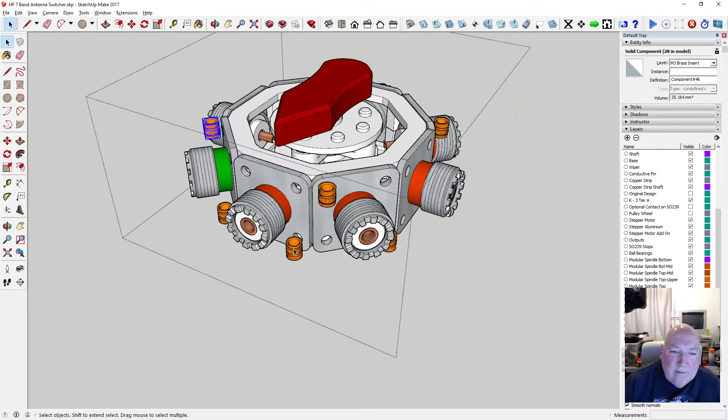I don't need X-ray mode. These are all in the wrong place. So I tell you what, let's just get these, get these brass inserts, or lift them up a bit. Up on the blue axis, something like that. I might as well get these out as well. They're in the wrong place, really. Oh dear, hang on, what happened here?

Right, so we've got the brass fixings. Let's bring them down a little bit. Okay, so we'll start with the top. Put the chassis clamps back on, so we've got to grab one from the middle.

I think we're going to need X-ray for this. Oh god, I can't see anything, there's that much stuff. Let's turn some stuff off, the shaft off. Oh, I didn't give them any name, they're not on a certain layer. What layer should I put them on? The shaft layer. Shaft layer, where are you? That's it.

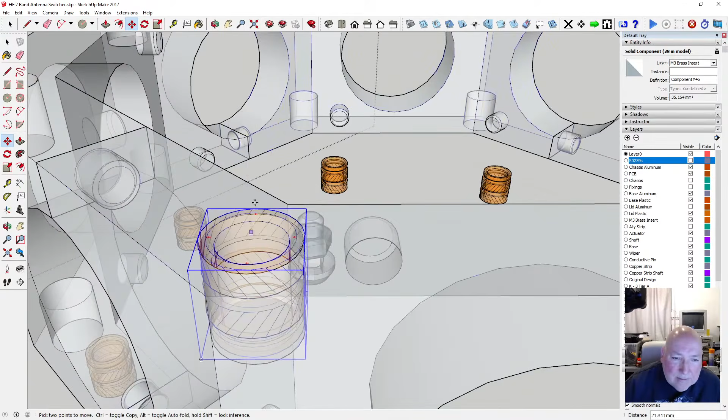Turn off the fixings - oh, the fixings are off already. What else we got? SO239s, right, I can see what's going on now. So I need to grab that from the middle, if I can. Yeah, push that in there. Right, that's one.

Let's get these lined up where they're supposed to be. That's having trouble. Sometimes it'll do that, it got on a weird angle. Alright, has that got it? Yeah, that's got it. Alright, next one.

So we're going to have 16 brass inserts. Oh well, it is what it is. You don't have to have brass inserts, you could have self-tapping screws if you want, but if you take it apart and put it back together, the thread's gonna go, so better off with brass inserts.

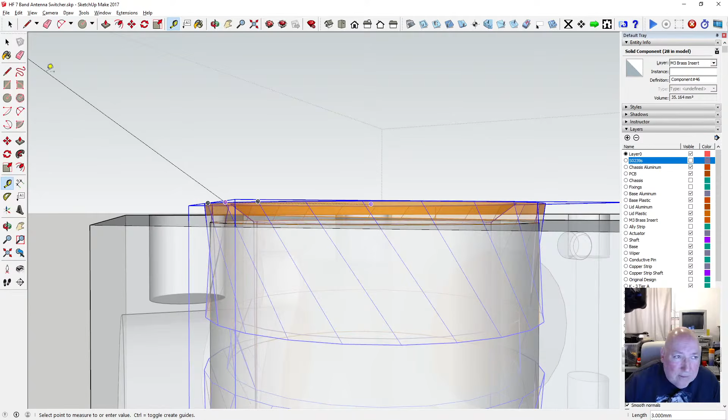.248. So if I grab them all, lower them by 0.248, and if I copy them, paste in place, rotate it round, rotate it around there on the red.

That's them done, yeah, they're all in the right place. Now I think we can just delete these. And grab - oops - we've got these in the wrong place. Paste in place, grab these and copy them.

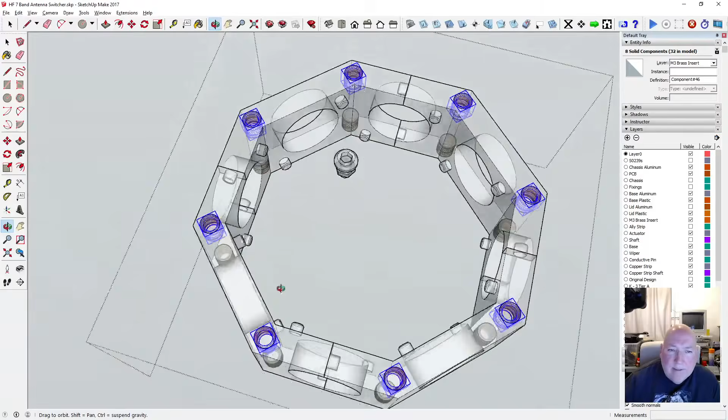You've got to get it before it references - there it is. So grab all them, put them in there, and they've all gone at the same time. Should have done, yeah, saved us a bit of work. Alright, come the right way up. We've got all the fixings to do as well, but I don't know if I can be bothered tonight.

So that's what it's going to look like. So 16 brass inserts, M3 by about 6 or 7 or 8 with a nut. And you got SO239s, 8 of them.

And you got stepper motor add-on, that's an add-on. And you got your bottom base aluminium - where's your base aluminium gone? Have I lost my base aluminium? Shaft, what's happened to the aluminium? And you got your cage to hold the SO239 straight in place.

Have I gone and deleted my aluminiums? Oh no, because I copied it off the lid aluminium. That's right, so I've got to change that one to - oh, it is a base aluminium, but internally it's a lid aluminium. So let's call it base aluminium. Let's turn off the lid. No, still got it.

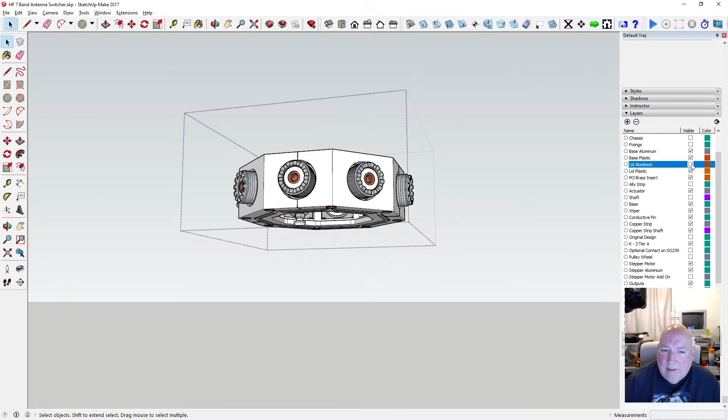Base aluminium, lid aluminium, base aluminium - where are you gone? It's not even aluminium anymore. Turn off the lid. Yeah, so turn off the lid, turn off the base. What's happened to the base? Where's the lid gone? There it is.

Okay, so put the shaft back on. Let's take off the lid. Right, so we've got everything in place now, we've got the new insert. Actually, that new insert will actually go on, it'll fit in that one, should do. So we could print them out and try them.

I could reuse these, just drill the holes in the right place, roughly - I might do that. I can't position them exactly on the milling bed, so I can't do it automatic, so I'll have to mark each hole and drill them manually. Too much like hard work, that is. So we might have to just go ahead and get the PCBs made - now we know where all the holes are going to go, we could just get them made, really, once I've made the PCB.

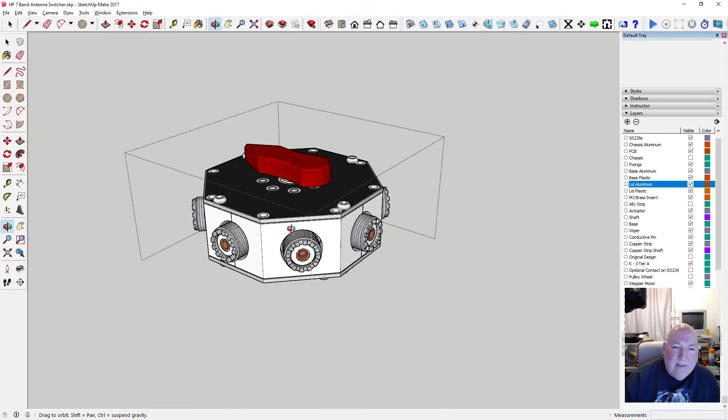So do I go and put them fixings in the right place now, or do we go and watch the TV and crack open something to drink? What time is it? Don't know. Yeah, that's a bit boring, putting them fixings in the right place. So I think that's going to be it for now.

Let's put it all back together. We'll hide the fixings for a bit. Mind you, it doesn't look right without the fixings on the top. Damn it, I can never leave it and just do it.

Right, here we go then. Alright, let's get the fixings. Sank it anyway, look. Yes, it's not right anyway. Right, so what I'll do is I'll grab it. Where can I grab it from?

Tell you what, I'll do it from this way. Just get rid of the excess fixings for now. I'll just grab that fixing and put it in. If it'll let us. No, it's not going to let us.

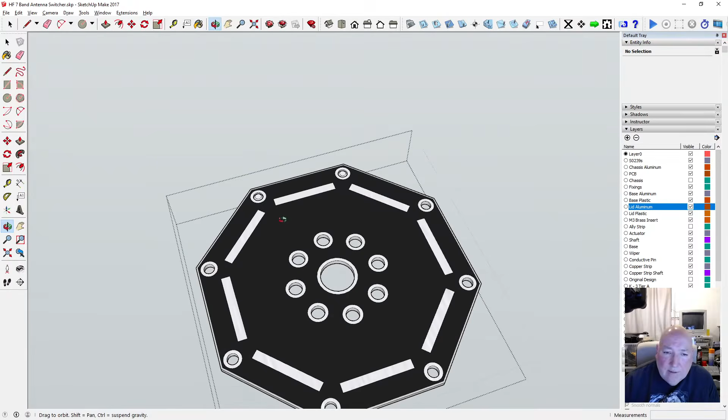And we can do something a little bit time saving. Copy to. Put them there. And we can just do something else, time saving. Copy and paste in place. And move them 90 degrees.

Okay, now we need to grab them all. Come the right way up. And lower them down onto the surface, just like that. Okay, they're all singing and dancing.

Right, and we need the same again. Let's just copy them out. Copy them. Let's do the same. Let's get rid of all these. Let's paste them in place. Flip along the blue.

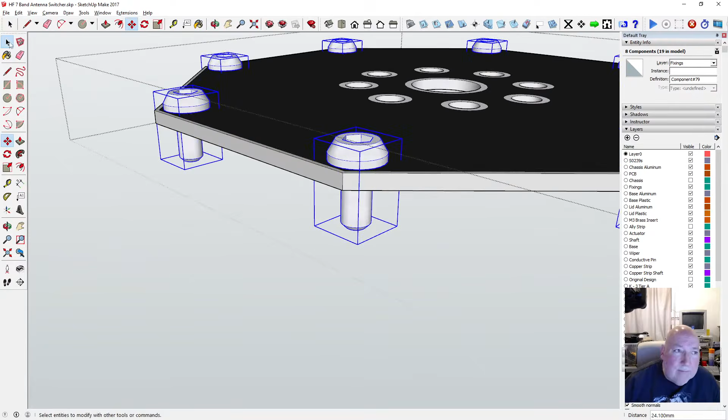You have to start printing, yeah. Yeah, that's true. Yeah, we should start printing.

Right, we've got extra fixings now. See, these are some of the... Why have I still got extra fixings? Some old ones, I think these were for the base, the old add-on. Right.

Okay, so we've got that there. We've got all the fixings on there. Now the add-on, the base add-on. Right. So that add-on there.

Oh, we've got fixings on the add-on. No, we don't have fixings anymore. We don't need fixings to hold the base on. It's friction fit, pushes on, you can hardly get the thing off, and it lines itself up with the PCB when you push it on.

So basically, if I grab that and come down 50mm, so all these holes here will cover up the fixings. That's the idea. They don't look big enough, do they? These aren't the real fixings, they're only a representation. Anyway, it does work because I tried it.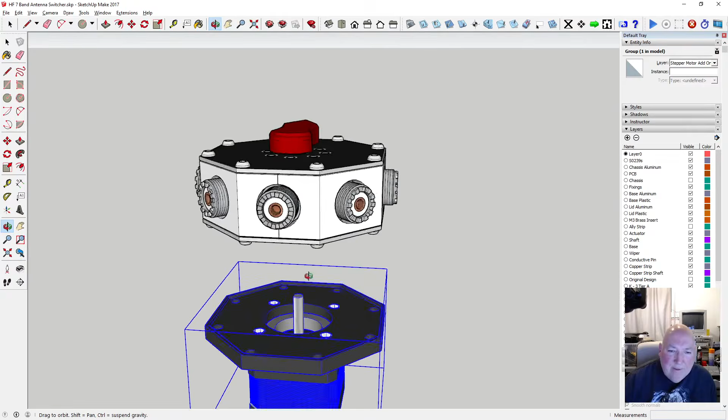So what you do is you undo that, push it on like that. Okay, so it looks a bit weird, not symmetry now, but that's an add-on. That's a manual version. Then you get your stepper motor add-on, and then you get your bottom ABS enclosure.

Alright, there's your bottom weatherproof enclosure, which is the whole thing. Let's just see. Go up 200 mil. We've not left anything behind.

So you pop that into there. Well, just grab hold of that and move it down 200 mil, and it pops into there. And then you fasten it to a pole bracket or whatever.

And then you put the lid on, and then route your cables, coaxes and whatever you want to do if you want it outside. So that's an option. Oh, and you've got your pole just for completeness.

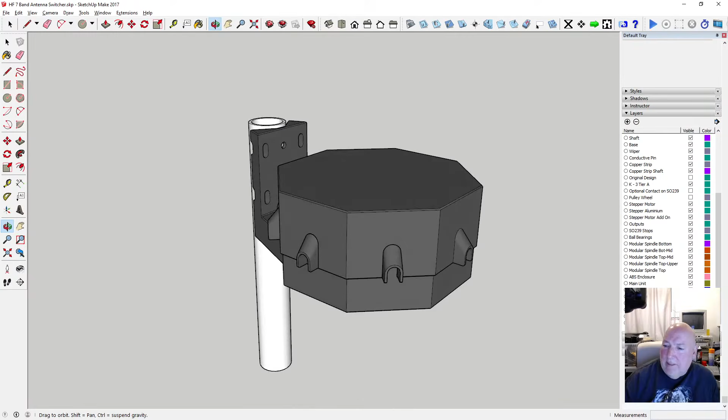You can either Jubilee clip it or whatever you want to do, cable tie it, tech screw it through that hole there and down there. I think you can get to the tech screw if you take the lid off, and without the stepper motor in, you can just about get through that hole there.

So you might be able to just tech screw straight to a pole if you want to use a tech screw, unless you want to drill and tap it. Anyway, so feed fully clockwise and then anti, so whichever one.

Right, so the only thing left to do is the livery on the PCB. Now we could go ahead and write some livery on here.

I could actually do it on here, but I'll leave that for another time. So let's get rid of that and the pole. Let's switch. There's lots of stuff on here we don't need.

The old chassis, I think we can get rid of that. Ally strip, don't know what that is. That's the old one, I think that's long gone. Let's just make sure it was long gone. No, there it is - one of my first ideas.

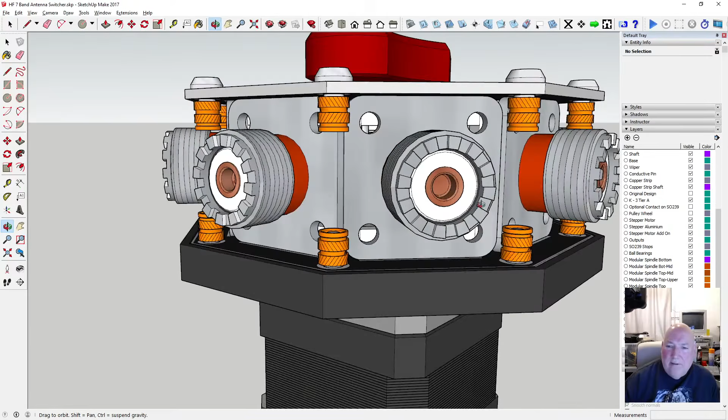The idea was to bend this out of aluminium, mill it out, and then bend it into the octagon shape. Turned out to be too fiddly. Then I realised we wanted the aluminium for the frame ground, but we now get our frame ground from PCBs instead. So let's hide this chassis - we've got the SO239s being the frame ground, and the PCBs doing the top and bottom frame ground.

Anyway, there's another view. Let's hide the contact strip. Can't even find it now. Where's it gone? There. No, that's the copper strip. Called it an Ally strip. Right, I've had enough of it now anyway.

Right, so done some major progress. We could do some printing. I'll tell you what, we'll print the insert to go in there, maybe. Let's hide the Ally strip and just have a look at that. So we want two of these.

Let's just try smoothing it, make sure there's no problems. Export. So what are we going to call this then? The lining - brake lining? No, it's not brake lining.

So I find chassis times 4 - that's the cage. Right, so this is going to be the top and bottom lid lining. Don't know. Frictionless lining? I don't know. Shaft...

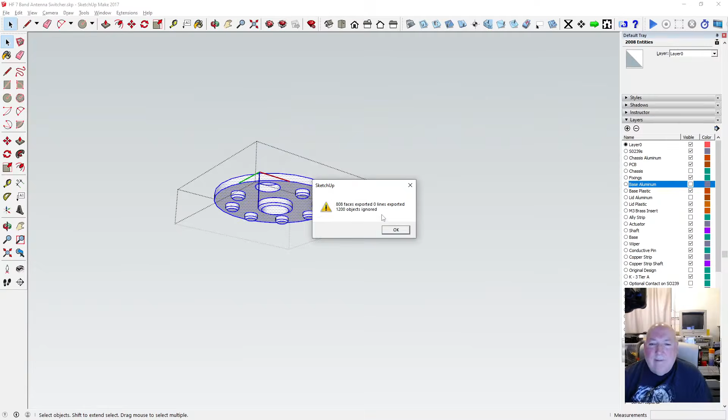Okay, so we've got Bambu Studio open here. File, new project, import. Actually, it's not really a new project, is it at all? Hang on then, now let's open up a previous project, which was these.

Yeah, so we've got it on here, so we don't want to print them. Oh, we might want to print them in a minute, but tell you what, let's bring them all back, all printable. And we've got 2 other objects now we need to add to this list - so those 2. Right, so we've got them there.

Need to - oh, okay, we can move them both together if you like. Right, so that one's the right way up, one isn't. So if we just click on that one and go auto orientate, let's flip it round, and that's it, deselect it.

Okay, now these are wrong. These are wrong now, and so are them. That's right, that's the only thing I didn't change much of. That's wrong as well. So it's never ending, is it? And that's wrong as well. These are wrong. That's right, and these are wrong. So, it's a labour of love, certainly is.

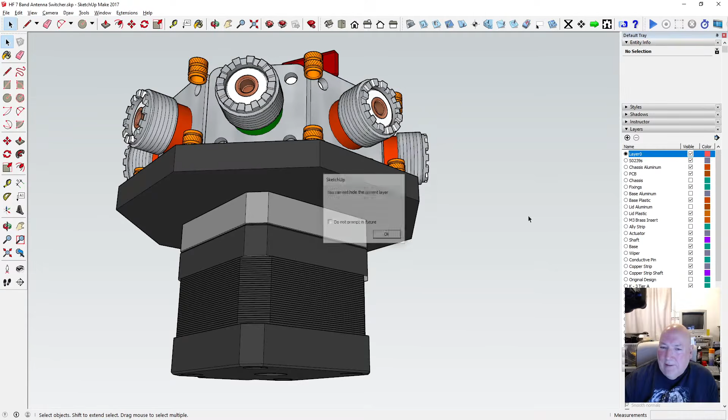Right, so let's go over in here. Wrong one. That's the brass inserts. Cage. Actuator. Alright, so we've got them 2 - we don't need them 2. I didn't actually call them anything, did I?

Didn't call them lining, okay. Shaft. Lining. Shaft top. Lining. Shaft top lining, and shaft bottom lining. Called it lid, called it top - so well, anyway, bottom lining. That's it, so we can turn off those two.

And we want to print - we want one of those. Let's just smooth it, make sure it's still the same inside. Yeah, it's okay. How deep is that? That looks as deep as the outside.

And this is modular shaft again, and it's the top upper. Then we want the copper strip bit.

Modular shaft, top middle. That stays the same. Tell you what, did it stay the same? Not sure it did. Let's just do it again anyway.

So what was that? Bottom middle. So top upper, copper strip thing, then that one. Yeah, bottom middle. And then you got your bottom.

The reason it's all split up is so you can print them flat. So I can print them all and put them together. Right, modular shaft bottom.

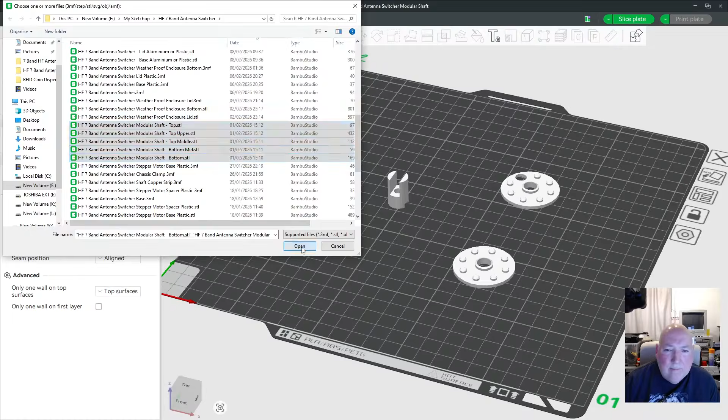Okay, we want to delete that one because we're not sure if that's even any good anymore. Let's move these up and across. Okay, we want to auto-orientate that, like that. That needs to be moved over here.

It's already the right way up. That can be moved across. Now that one, is that the right way up? Yes it is.

There's pros and cons from grouping them close together or not. If one starts to fail, it'll leak all over the other one. So what we like, let's move that up there.

Right, what's that like? It's not too bad. So it prints all the little parts out. So let's see what we've got. We've got that, that, and that. Yeah, that's it. And then these two.

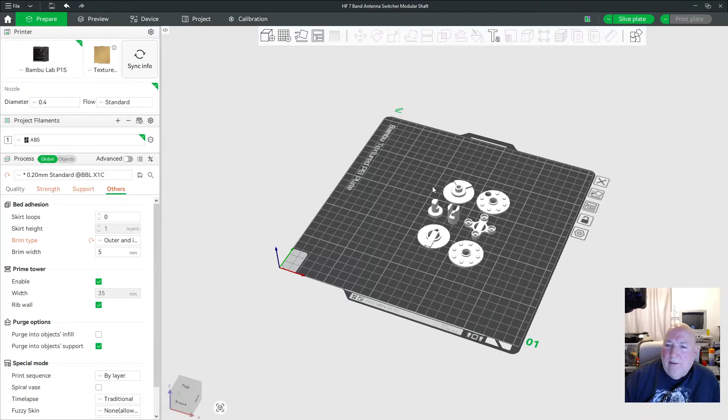Right, and it'll join them all up together, so we'll slice the plate. Hang on, let's just make sure we got the right device. We've only got one device here, some people have got loads. Make sure we got white ABS, and slice it up.

Okay, the graphics card spinning up. Right, so we've got what we've got here: 29 pence of plastic, according to that. 46 minutes to print them out.

And we've got, see that brim there? What I need is the brim to attach to everything, and it holds it all together, stops it moving.

So what I'm going to do is go back to this one, bring that one in a bit. Can that one go in a bit? No. Well, you can go up a bit. I'm bringing them closer because I want them to join up, a bit.

And the reason is to hold them all together with a brim. Slowly learning from mistakes.

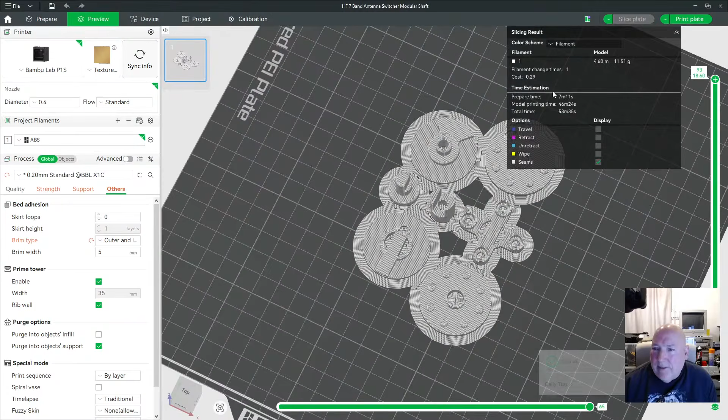Right, okay, let's slice it up, see if we can get them to join up the brims. The brim just holds it all together, sticks it to the bottom of the bed. So we've got still the same price. It's joined there, there and there, so it stops it slipping around so much.

I mean, really, I could rotate that and then stick it in there, but that's okay. It just helps it all stay put while you're printing it. Right, let's print it out.

Now the first one is always abysmal, because I don't think it's warm enough in the chamber. So you warm the plate up, there's no active heat in it, it gets warm from the plate, so by the time you do the first print the chamber isn't warm enough, maybe.

Or I'm just getting lazy, I haven't scrubbed the heat bed plate, the build plate enough, and it will just slip. It's this ABS, it's very slippy, it will slip.

Anyway, so, got that on the print. I don't need it yet, but we'll print it anyway. Right, that's probably going to be on another stream though. Can't see me waiting that long. Let's just let that wait for the heat bed to reach the target temperature.

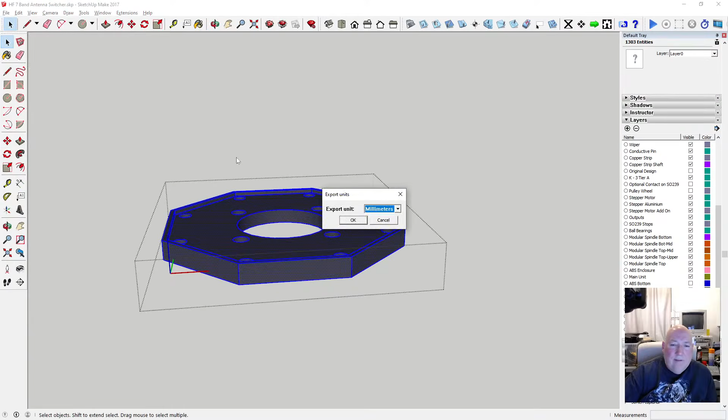So that can be done, export this to an STL file. So we're going to call this the stepper motor add-on, spacer and base. So it's only the base we need to print again.

Okay, let's go back to here. I think we can prepare. Can we prepare one while we're doing one? No, I bet not.

It chucks the plastic out and melts it, coils it up, and throws it in the bin at the back. It drops out the back of the printer.

Filament loading. Alright, we've got 39% humidity. It's about where, if any higher than that, it'll probably have problems. You can see it pouring out the filament, ejects a bit through, dumps it. Basically it's just waste. But if it doesn't do that, it's stuff that's probably left in the head from last time. Could be any colour—if you've had the printer switched off, it doesn't know what colour. So this will just drop off eventually.

So what's it doing now? Waiting for the heat bed to reach temperature. There's the heat bed temperature, and there's your nozzle temperature. This ABS melts at 90 degrees. PLA, that red stuff, melts at 55 degrees. And it's not UV—this ABS, you can put it outside and the sun won't melt it, and the UV won't affect it much. This stuff's no good for outside—the sun will warp it, this PLA, and whatever else happens, it'll warp, and the UV light off the sun will kill it.

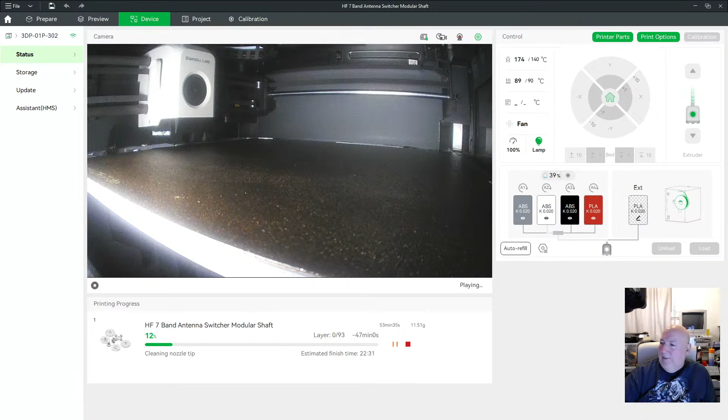Let's just have a quick look at the model again. Right, what did the thumbnail say? Optimising the fasteners—well, I did optimise the fasteners. Yeah, we did some other work as well.

What's that doing now? Auto bed levelling—yes, it brings the bed up and down and touches around the tool head, levelling. Clever stuff, really. Alright, so I don't know where we got to with this. Shaft lining, top shaft lining. So hopefully, with them being fixed and these surfaces being the same, and they're very slippy together, it should be—and as long as these bearings are not too tight there—it should be a nice operation. Should be.

Alright, so you've got your shell, let's put it all back together. Okay, what else? Bottom PCB—no, I haven't even called it a PCB, let's name it for what it is: base plastic, base aluminium, so it's the base PCB, and then you've got your lid aluminium, which is lid PCB. Okay, we've got our fixings with it. And we can put on the chassis, and then the actuator—yeah, the actuator's not liking it much anymore. I think we need a round one. Never mind, we'll leave it for now.

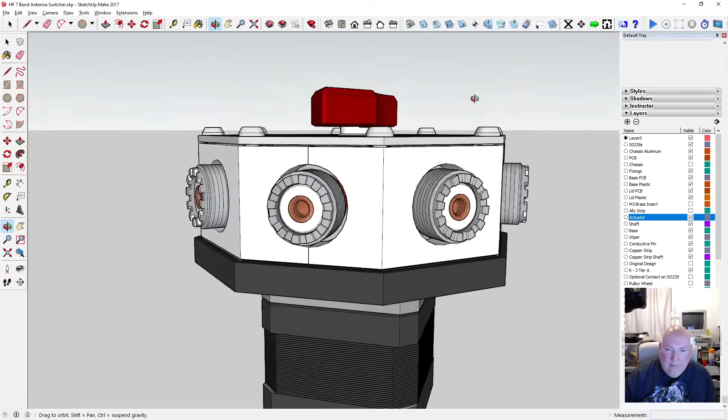Right, save all that. I suppose we better put the bottom ABS on, and the pole, and the lid. That's it. Can't see anything now—what about in X-ray mode? Can you see too much? Can actually see quite a lot. Yeah, we'll leave it like that, I think. Something like that. Doesn't matter where you put it, unless it's moving, you can't see what it is.

Right, let's find out what's going on with this. Oh yeah, it's just starting to print now. It's done its... see what it's done—it's pulled the test print with it, stuck to the head. So I'll cancel that, I think. Cancel that, it'll be on the second go, it'll be fine. I'll have to go down and take that off, clean the head, clean the bed with a glasses wipe, just scrub it. The nozzle's got that bit stuck to it—it's normally the first time, it's cold, cold weather.